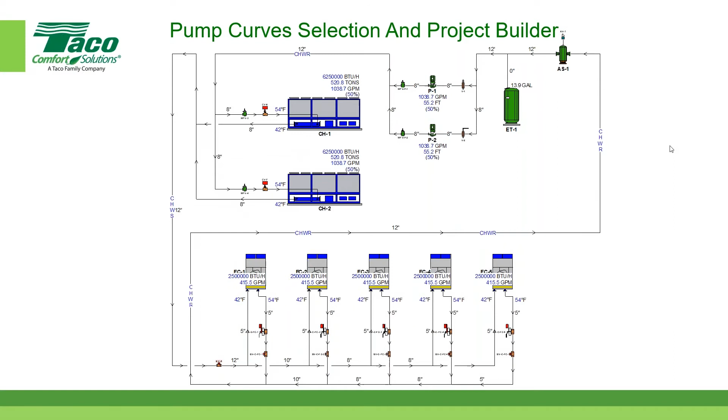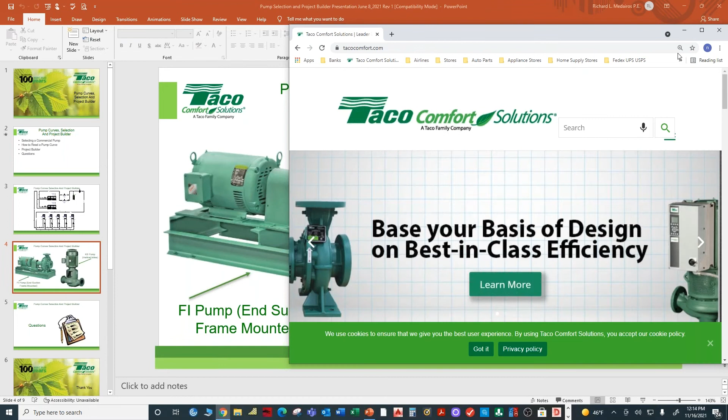All right. So now we're going to go live to TACO's website. So I'm going to click on Google here and then go right to TACO's website. This is the home page for TACO's website. And we're going to use the pump selection tool to make the selection for the commercial pump represented by our simple diagram. So we're live right now. This is not a demo screen. I'm live on our TACO website.

So I'm going to click on selection tools, and then on the left-hand side, I'm going to click on project builder initially because I'm going to come back to this later. So I want to make sure I'm logged in. So now I'm going to go over here to pump selection. So when I go to pump selection, I open up the TACO pump selection app, and this is where I get to fill in the information.

So the first little box here is where we choose the pump type. And in this particular case, we're going to go with a standard pump. Each one of these little circles is a radio button. I could choose an OE pump, self-sensing pump, standard pump, or a high efficiency pump. But for today's selection, I'm going to focus our attention on a standard pump. So I'm going to click on that radio button for standard pump.

And then in the next box is where I enter the information regarding flow and head. And I believe I said 1,200 gallons per minute for today's selection. 12 and then 60 feet of head. Now, where it says minimum efficiency, if I wanted to, I could put in a value, but I recommend if you're using the software to leave minimum efficiency at 0, and that way you can see all of the selections that the software has to offer.

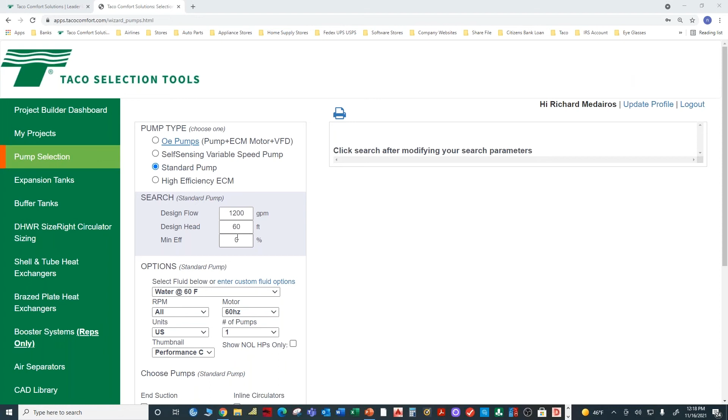So we've put in the flow and the head, and I've recommended that you keep the efficiency at 0. And for options, for now, I'm just going to leave these default options the way they are, and I'm going to come back to that a little bit later. And now the next category says choose the pump. And as we talked about initially, if you'll notice, we have the commercial pumps listed in the order of popularity.

So on the left-hand side, we have end suction, which is the most popular, and then the vertical inlines are coming up in popularity. I would expect, and I think, Brett, you would agree, that the vertical inlines are going to bypass the end suction for popularity in the next couple of years. Yep. And then we also have other pumps, and as I said, if we have some time at the end of this discussion, I'll show you what some of these other commercial pumps look like, and they would be the horizontal split case, the vertical split case.

And then on the right-hand side, if you notice, we have inline circulators. Those are the smaller pumps that are used in a combination of applications, but we're not going to focus on those pumps today. We're going to just talk about the larger commercial pumps. So Rich, I think this is a great time to answer Jim's question. Quick explanation on close coupled pumps. Yes, a close coupled pump. So on a close coupled pump, the motor is connected directly to the pump.

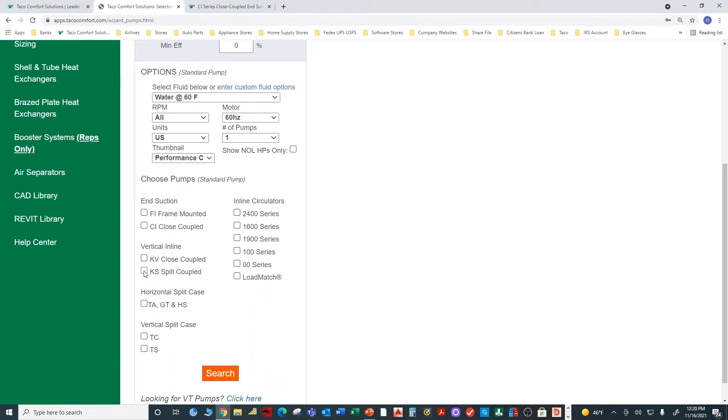Correct. Yep. All right, so we'll go down here where it says choose pumps, and today I kind of like the KS, which is what we showed initially, a vertical inline split coupled pump. I'm going to click on that, and then click on the little orange button here that says search, and now the software is going to, oops, there it goes, yeah. So it's making several recommendations, and in a moment, I'm going to go through this with you as to why I would pick one pump over the other.

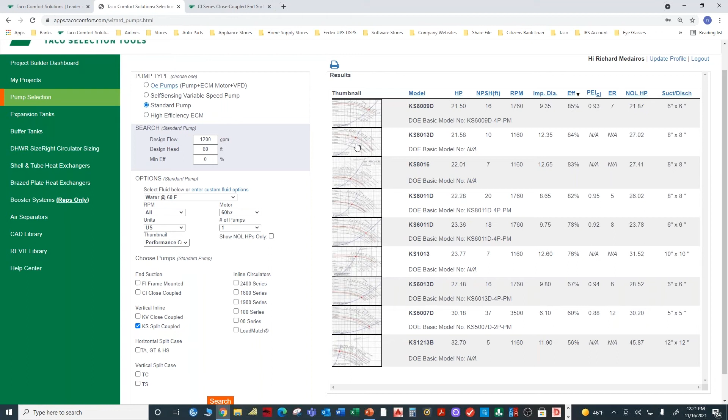It's gonna go back and forth here in a moment. But I'm going to pick the one that's second from the top down. So I'm going to click on that. These are called the thumbnails. And then I'm going to click on that pump curve. Well, let me zoom in a little bit because the data that I'm displaying over here, grab my pen.

I generally refer to this data up here as narrative data. This is what the software has actually calculated for the specific. In other words, we asked specifically for 1,200 gallons per minute at 60 feet of head. This particular selection is running at 1160 RPM, and the software has predicted that the impeller diameter should be 12.35 inches. We'll see what that means in a minute.

Hold on 1 second. It's one of the challenges of working remote.

And so it also displays the size of the pump was an 8x8. Let me erase that so I don't. Yeah, it's an 8x8, and again, as I said earlier, this is a vertical inline, which means that the suction size is the same as the discharge size. This particular pump happens to be 84% efficient at the design operating point of 1,200 gallons per minute, 60 feet of head, and we'll get into this in some detail.

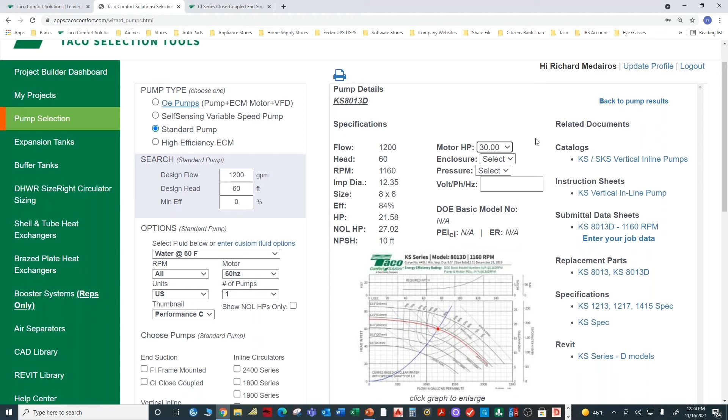But now I'm going to zoom in on this pump curve, and then we'll get a little bit clearer picture of what the pump curve looks like. Brett, any questions popped up before I start getting into some of the details of the actual pump curve and how to read it? All right.

So whenever I look at a pump curve, I always divide the pump curve. Oh, I'm sorry, I should tell you what thing is what here. So the red line represents the pump curve that would provide us with 1,200 gallons per minute. That's this point down here. There's 1,000, 11, 12, 13, 14, 15. So I put that tick mark at the 1,200 gallons per minute. And over here on the left, that's 60 feet. So there's our design operating point where those 2 points intersect.

So now we have to have a pump curve, and I believe we said that the impeller diameter would be 12.35. Is that what we said a minute ago, Brett? 12.35. Well, I'll go back to that value in a second here. I think it's 12.35 inches. And I'm just going to do a quick back and forth here just to make sure. Yes, 12.35 inches. So there we go.

Okay, so this red line shows us the pump performance if we cut the impeller from its original full size of 13.5 inches down to 12.35 inches. And the red line represents the performance of a 12.35 inch diameter impeller spinning at 1160 RPM. Grab my pen one more time. Spinning at 1160 RPM.

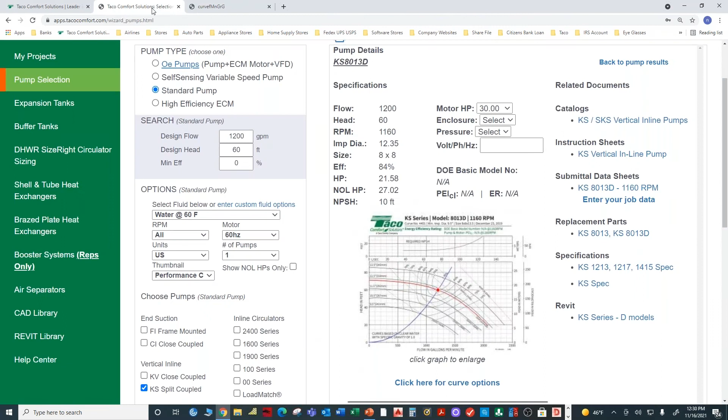So you can always divide the pump curve into three parts and use your imagination, or you could draw it like I did. And then try to select the pump within this center section. So that's why I need to go back and forth a few times here. Going back to the initial selection, I'm going to click up here where it says pump, back to pump results. That'll show me the multiple selections I had to choose from.

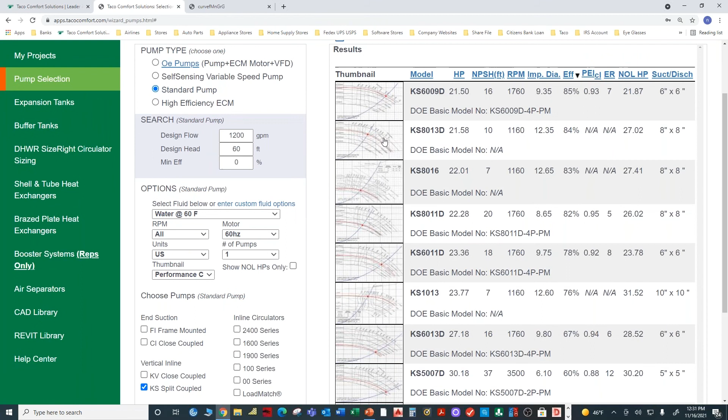So even though the thumbnails are relatively small and I can't read the values, I'm just looking at the shape of the curve. And so what I tend to do immediately is eliminate the pumps that perhaps would not be all that desirable. This one, it's too far to the left, too far to the right, too far to the right. This one, a little bit too far to the left for my interest. This one's pretty good, actually, just on the tail end of the center third.

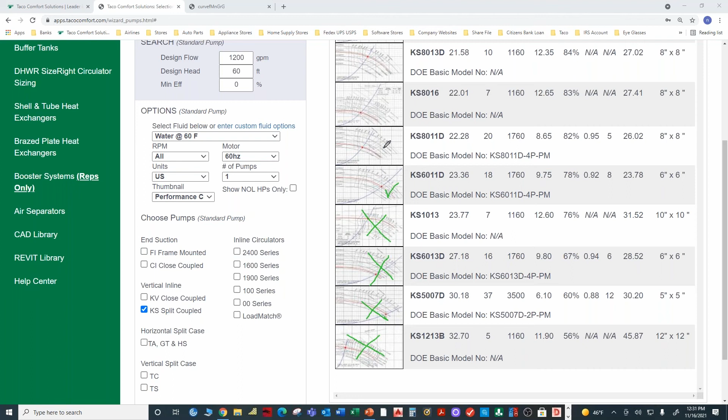This one is also in the center, but chances are I wouldn't select this pump because I'm fairly close to the minimum impeller diameter, and the efficiencies tend to drop off a little bit. So let's keep going on here.

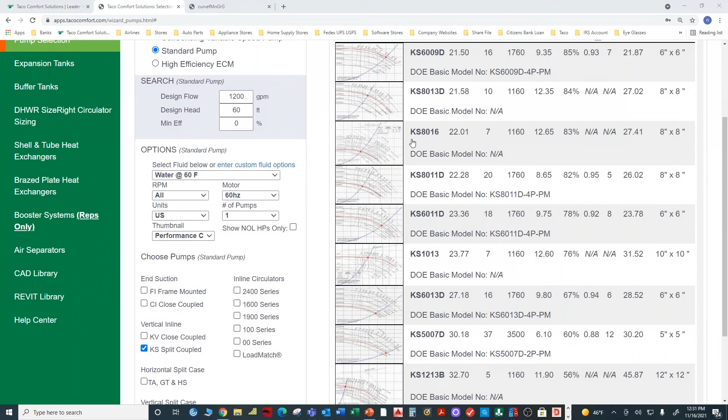Yep, whoops. Let me get rid of those green lines and scroll up a little bit. So if you'll notice, like I said a moment ago, this is a reasonable selection. This one is reasonable. This one is a little bit far to the right, but it's still okay. But the one I picked right here is the one that I like the shape of most of all.

And again, I use that little example of dividing the curve. I don't have to have the big giant curve in front of me. All I need is the thumbnail, and I want to be in that center section, which is why I selected that pump. So getting back to our pump curve here, you can see that if you divide the curve into 3 parts, you kind of want it to be in the center. And it's nice that the curve is not at the extreme.

It's not the extreme where it's the largest impeller diameter. It's not the smallest impeller diameter. It's kind of in the middle. And that gives you lots of room to move left and right, up and down, in order to accommodate perhaps a slightly different system configuration than what was originally anticipated.

Okay. The other thing I like to point out on the pump curve is, let's grab another color here.

Let's do, how about pink today, Brett? There you go. I like pink. Hey, the 5th generation of the White family is 2 girls, so pink is great. So in honor of the 5th generation of the White family, we're going to stick with pink today.

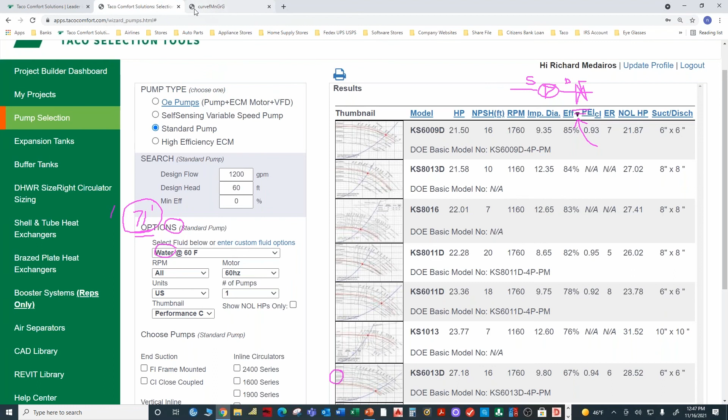So that was some quick tips on what to look for. The other piece of information is the power consumption. If my pump was originally sized for 1,200 gallons per minute at 60 feet of head, we said it was consuming somewhere around, I think it was around 22 horsepower. Let me go back to that other curve for a moment. Oops, what happened, Brett? Oh yeah, here we are. That's this guy. We said that was around 21.5 horsepower.

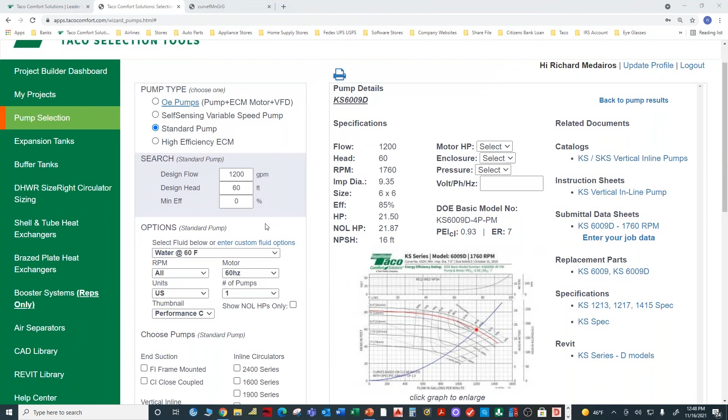Something doesn't look right, Brett. What did I do wrong? Oh, I know what I did wrong. Let me do this again. Let me erase these lines. I got so excited. That's the wrong curve. It's the wrong curve. That's what you did wrong. Thanks, Brett. Okay. I got so excited there, I picked the wrong curve. Okay, let's go back here. So it was around 21.5. There it is, 21.5 horsepower.

So we can measure the amount of power that's input. And typically what we would do if it had a variable frequency drive, we'd measure the power input to the drive, which is the volts and the amperage. We take into consideration the inefficiency of the drive and the inefficiency of the electric motor to arrive at the actual power being consumed. So if we can measure those pieces of information, we can generally determine if the pump is operating as originally designed.

So I'm going to actually jump into Project Builder. Looks like we have some time to do that. Brett, are there any other questions out there before? Yeah, there's a question that's been hanging, and you kind of touched upon it. This may be a good time, Mike said, to mention how power is cubed. So if you run at 66 hertz, you are at 33% higher power, which could overload the motor. Good point. That's really correct. It's not a question, it's kind of a statement. Yeah, that's a great observation.

Sure, so someone asked originally, can I increase the pump speed? And the answer is yes. But what I forgot to mention is not only do you have to check the mechanics of the pump, but you also have to make sure that your increased speed can be accommodated by the electric motor, which is a cubic relationship of the speed. So in other words, if I wanted to increase the speed from 1160 to 1200, I take 1200 divided by 1160, and then I would take the cube of that, which comes out to about 1.10, which means that my new horsepower would be 10% greater, even though my speed increase was only 3%. My power consumption would be a cubic relationship to that. So that's a great observation.

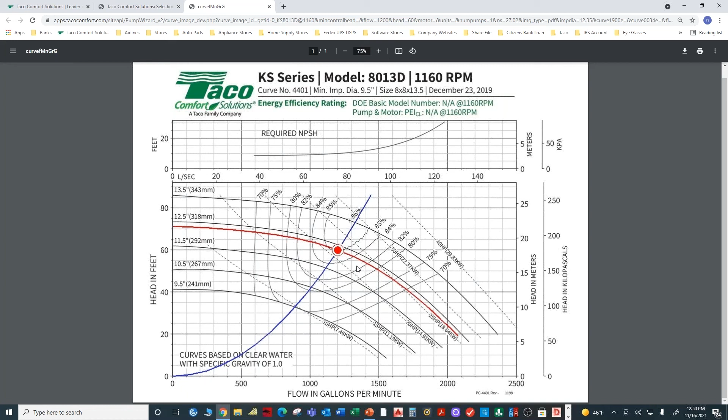Thanks for that. Yep. Good stuff. People are paying attention today, Brett. Yep, smart people. As usual, the audience is smarter than us. They are. That's what I like.

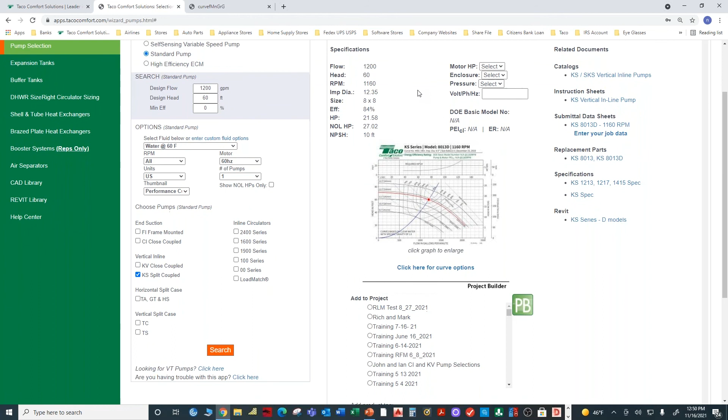Okay, so now we've made a pump selection. I'm going to actually show you how to take advantage of the Project Builder software. If you'll notice, I can scroll down and this little sign here says Project Builder and it says Add to Project. I'm going to actually create a new project. So I'm going to scroll all the way down to the bottom. I'm going to click on this radio button that says Add to New Project. Let me zoom in a little so everyone can see what's going on here. I'll have to move this down one more time where I can type in the project name. We'll just call this Training. Oops. Did I spell that right? Yeah. Training, and I'll just put in November.

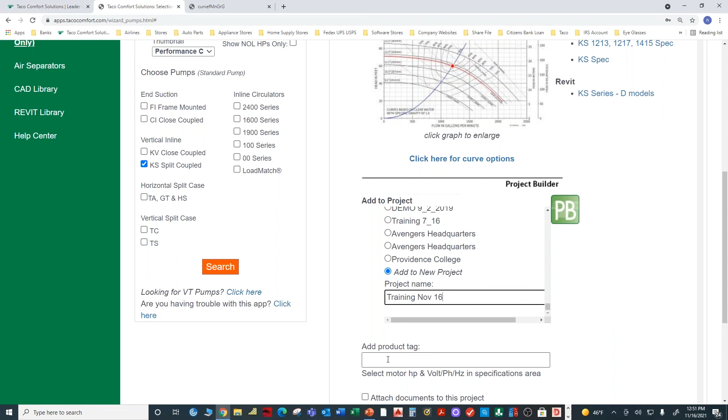Today's the 16th. Wow. We have like a week and a half till Thanksgiving. Did everyone get their turkeys this year? Hopefully they got them in time. I don't want to tell people we got our turkey and we set up our Christmas tree and all the presents are wrapped and underneath it already. Wow, I'm coming to your house for Thanksgiving. Have you got my present already? It's already, baby. Another bag of coal.

Okay, so we're going to add a product tag. Let's assume that the drawings that I'm working with call for this pump to be P1. So I'll put the tag number in there. Then I can go down here where it says attach documents. I'm going to click on that. And for today, I'm going to attach the submittal data and also the catalog. Scroll down some more. I'm going to press this button that says Update Project Builder. Press on that. And then go to Project Builder.

And so what's really cool about this is that it's building a schedule for our pump. And if I should mess up, let's assume I mess up, for example, and somehow I shut off the computer or I lose power or I go out to lunch and I forget to do my thing. Once I've made my pump selection in Project Builder, I can now go back to my Project Builder. I'll pick up exactly where I left off. So there's training November 16th. And if you notice, I'm back exactly where I started.

Now, obviously, if you have only one pump that you're selecting, it's not that big of a deal. You don't really need to use Project Builder, although I always recommend it. But if you get involved with projects like Brett and I do that have 20, 30, 40, 50, 100 pumps, you start putting that much time and effort into your selection process, it makes it extremely convenient to use Project Builder to save all of that information.

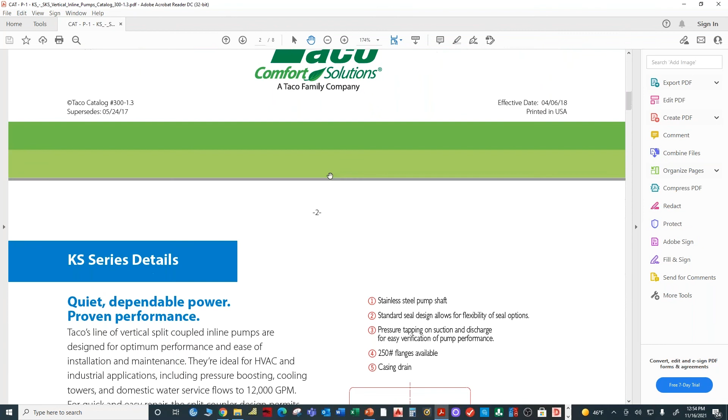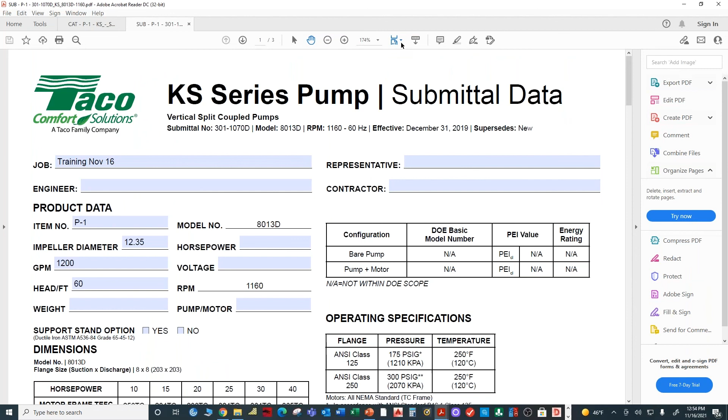And now I can open up that zip file. You can see the documents that I saved. So there's that catalog. I saved the catalog. So all the information about the KS pump is now attached to my project. And then also the submittal data sheet. This is really cool. So I just put in the job training November 16th, but look at this great submittal data sheet. All of this information is already done for you. It's got all of the information about the pump.

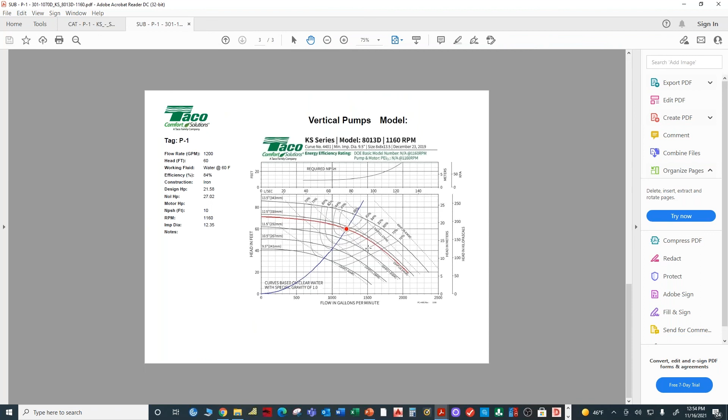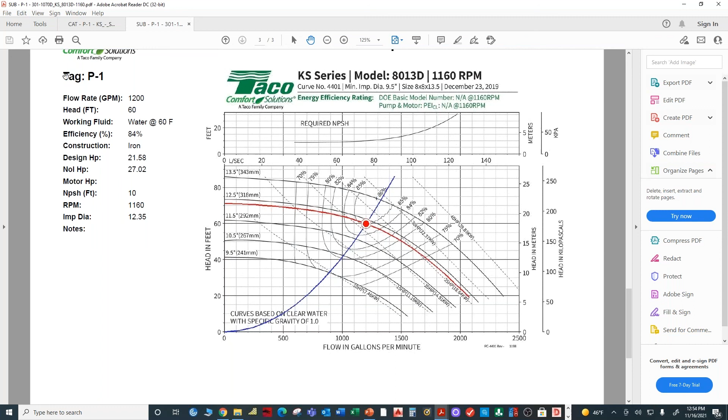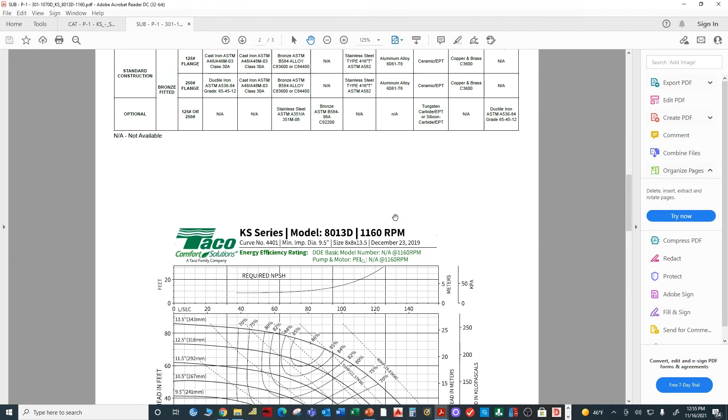If I scroll down, you'll see the generic pump curve. And if I scroll down to the bottom, let me zoom in a little bit. I have the specific pump curve as part of my submittal documents. And I have all of the information that I showed before. So I have the narrative data on the left side here, and I have the pump curve, and I have the pictures. I'll scroll up. There's the generic pump curve. And then also all the information about options and dimensional data all in one location.

And again, because it's in Project Builder, I can access this information from anywhere on the planet as long as I have a, what do we call that thing, Brett? Google and, yeah, we'll think of the name of it. Somebody could type it in for me. A browser, that's the word I'm looking for. As long as you have a browser, you can access your information from anywhere on the planet.

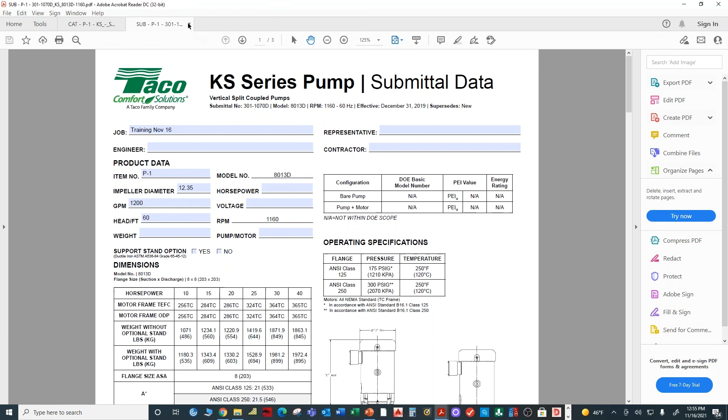And so now that we're into Project Builder, which is really cool, we're going to close all the tabs here. We can also, let's go over here. Yeah, let's look at that. Oh, I saved it. So I'm going to go over here just for the fun of it. I've got training 16. Here's the documents. And also it creates a spreadsheet. So I'm going to click on pumps tab in the bottom here. So this is all the data. There's that pump, there's the tag number, all the information that we just asked for. And so you can cut and paste this and put it right on your drawings, right into your Revit files or your CAD files, whichever you want to do.

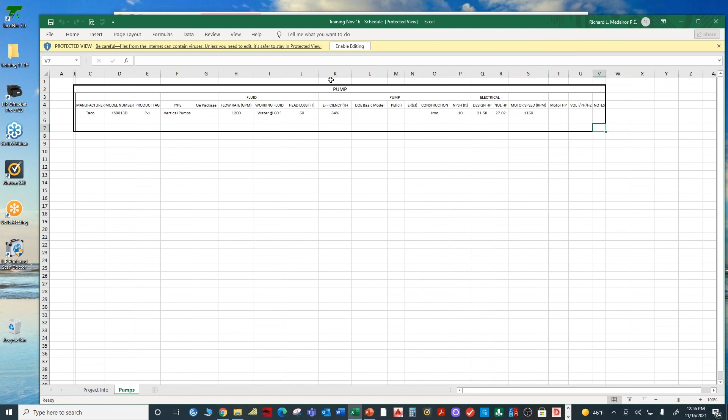So that's really cool. Now, the other nice feature is that once I can go back here to my selection. Once I've started Project Builder, now I can just add to it. So, and I'm going to do a very fast example. Let's say I want an expansion tank. I'm going to click on the T over here. My project's got an expansion tank. Let's say the system volume is 2,000. I'm not going to go through an instructional period. I just want to kind of do a quick demo here of the expansion tank selection,

fill in all of this data, search, and I like this one here, so I'm going to click on that, add to project, and I'm going to zoom all the way down here because I want to put a tag on it. I'm going to put expansion tank-1, ET-1, attach documents, a submittal catalog. I've liked catalogs today, update Project Builder, and then go to Project Builder. I know I did this very quickly, but I wanted to just demonstrate that not only do we have the original pump tab in our schedule sheet, but now we also have an expansion tank.

So I can add whatever I want in Project Builder very, very quickly, and everything is consolidated into one location. So Brett, we have a few seconds to answer some questions. Yeah, we have a good question here. Could you please explain the pros and cons when we should use a suction diffuser?

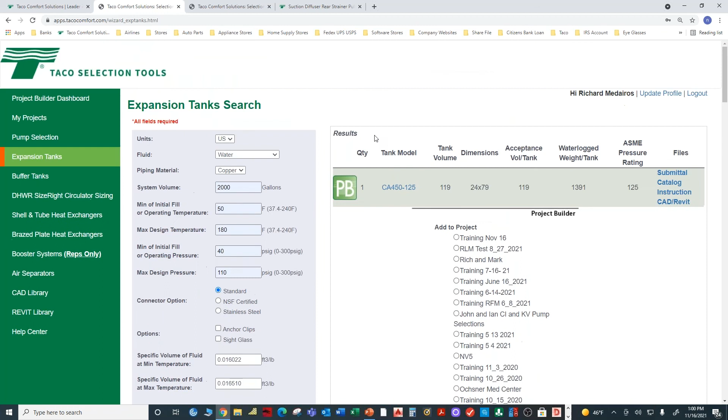Let's just do a quick thing here. My projects. And then when that screen comes up, we can scroll down to Avengers Headquarters, and let's see what the Avengers Headquarters was specifying here. Am I going to be able to find it without running out of time, Brett? Look at all the projects I'm involved with. This is unbelievable. It's not in alphabetical order, huh? Not in alphabetical order today. Well, so it's the good news and the bad news. We did have a project called Avengers Headquarters. Oh, you got to go scooting up. So the folks at the Avengers Headquarters building, they consult with us all the time. Sometimes I help them with their superhero questions, but most of the time I help them with their pump questions. So, as I always like to say, let's go.

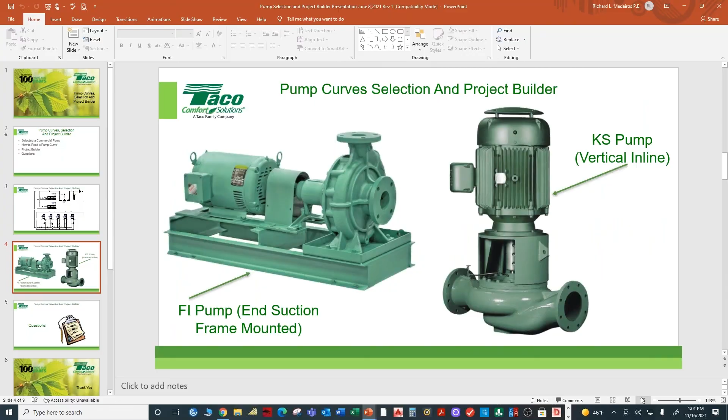And any last question before we sign off, Brett? No, we're in good shape. Well, thanks everyone for participating in today's presentation for TACO Tuesday with the commercial focus. And as we said, today's discussion was all about pump curve selection and Project Builder. Hopefully you got something out of it.